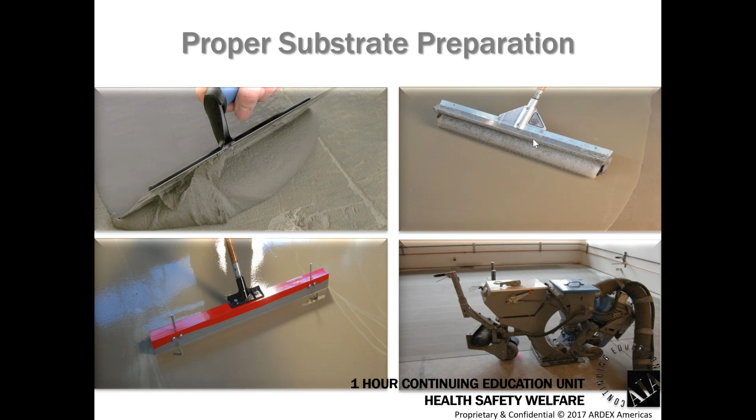As Alyssa said, we're going to spend some time here talking about proper prep. Proper prep is critical to the installation of any material going onto a substrate for its success. We're going to talk about proper prep of surfaces to receive patching and leveling products. So the bottom line here with proper prep, it's really not a one-size-fits-all philosophy. You're going to look at any given substrate and make the proper prep for that given substrate.

In doing so, making the proper preparation to that substrate, the installation is going to perform for a long period of time. It's certainly going to cost less because we have no costly callbacks.

In this presentation, we're going to spend some time on concrete. We'll look at concrete treatments such as curing and sealing compounds, the contaminants that we see out there in the industry. We'll look at the different methods of mechanical preparation - shot blasting, scarifying, grinding, those types of mechanical prep options. Certainly all concrete has joints in it, and one thing we can confirm is concrete cracks, so we'll spend some time on joints and cracks and how to address them. And then we'll get into the different other types of substrates, whether it's ceramic tile, porcelain tile, maybe wooden subfloors, epoxy coatings, terrazzo, and things like that.

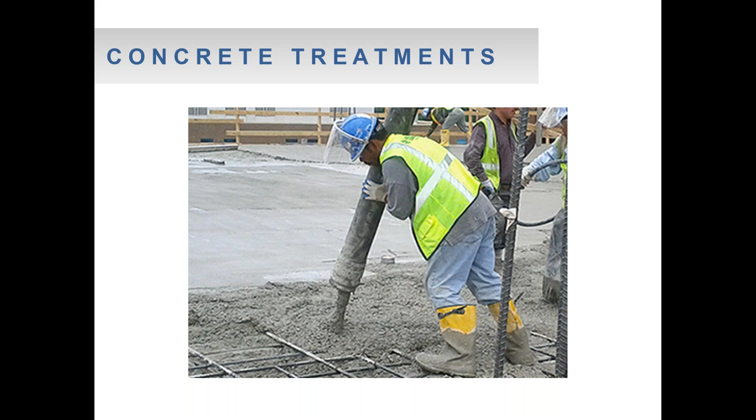So, concrete treatments. When we pour concrete, it comes out of the chute, or in this case is getting pumped, as you see. It's got to be screeded, floated, finished, and ultimately we have to cure that concrete. If we don't properly cure the concrete, then the concrete never achieves the strength properties that it was designed to achieve.

So in essence, we'll talk about curing and sealing compounds that are used on concrete, but we'll also get into burnished concrete, chemical hardeners like the sodium, potassium, and lithium silicate materials, and also look at moist curing, waterproof paper, polyethylene sheets as methods of curing concrete.

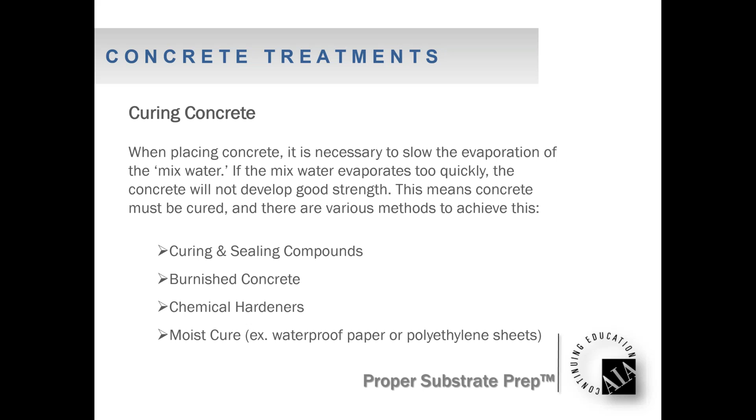The most common method is a topically applied curing compound, referenced as a cure and seal type material. That's basically once the concrete has been screeded, floated, or finished, this liquid curing compound is applied to the surface, and it will seal that surface so that the moisture that's in the concrete does not leave too quickly.

Maybe you remember back as a kid when they were pouring concrete, maybe they threw burlap on it and told your dad to keep it wet for a week, or maybe they threw straw all over it and told your dad to keep it wet for a week. Those are some conventional methods of curing concrete. Obviously not done present day, because the concrete poured commercially, as well as residentially, they want to be back on that the following day.

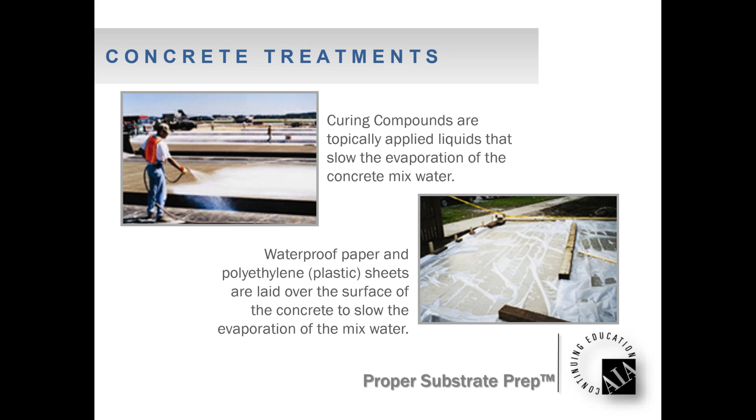So very commonly a liquid curing compound is applied. There's different types of curing compounds out there. Some are bad, and some may be okay for the installation of patching or leveling products.

The first one is what we call wax emulsion, and you can see this in the data sheet as well as the SDS. The wax emulsions are difficult ones, they're dangerous ones. Nothing wants to stick to a wax. The bottom line, when a wax emulsion curing compound is used, that's got to be mechanically removed prior to putting a patch or leveling compound on that surface.

The second category is what's referenced as a clear hydrocarbon resin. These materials you'll see in the data sheet labeled as dissipating curing compounds. The thought behind this is, hey, if it dissipates, that's a good thing, because they dissipate with ultraviolet light, they dissipate with foot traffic. So most people are thinking, if it's a dissipating curing compound, the sun makes it dissipate, foot traffic, construction traffic makes it dissipate, it's gone.

That may be the case in the middle of the slab where the sun's hitting it and where everybody's walking, but over next to the wall where the sun isn't hitting it, nobody's walking, you still may have a curing compound there. So the bottom line with these dissipating curing compounds, they're actually the most dangerous ones out there from a bonding standpoint, because you don't know if they're there or not, due to traffic, due to ultraviolet light. So with regard to these clear hydrocarbon resin dissipating curing compounds, we always say to mechanically remove those down to clean concrete.

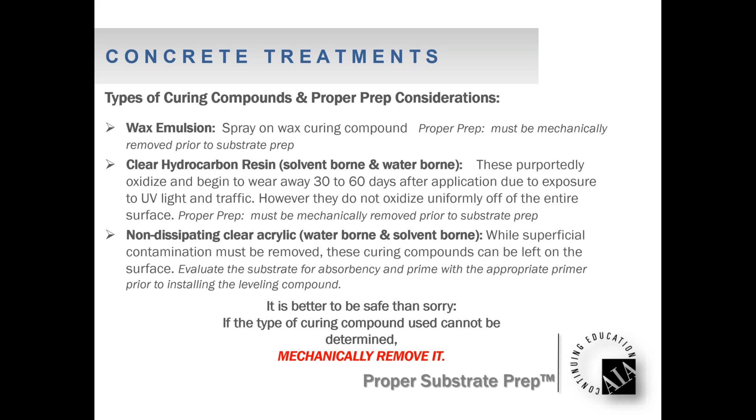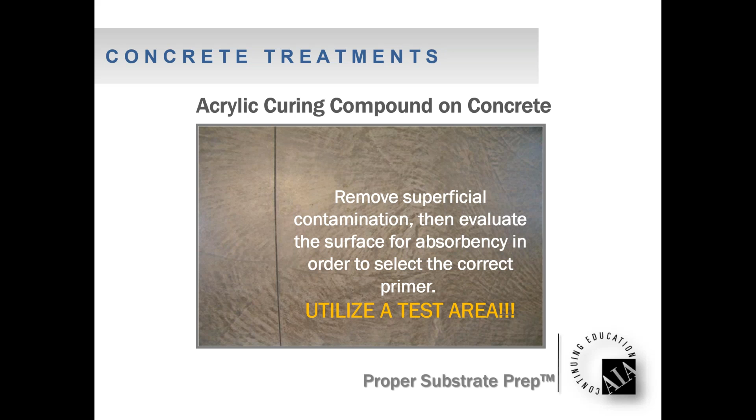The bottom line in this situation, as I said a few minutes ago, remove superficial contamination, evaluate for absorbency, and then with the manufacturer, agree on the appropriate primer as necessary, and test areas as always.

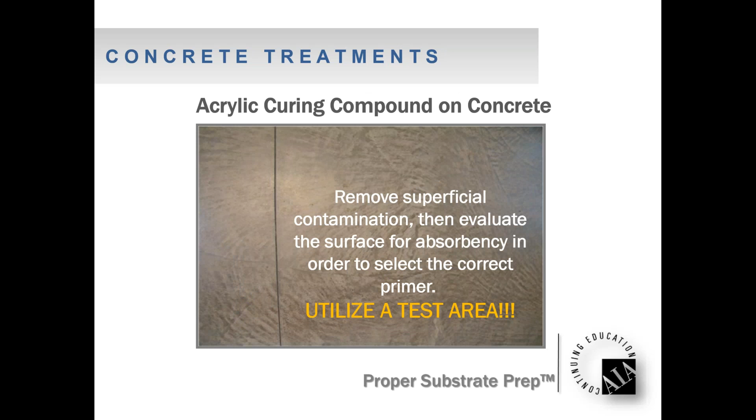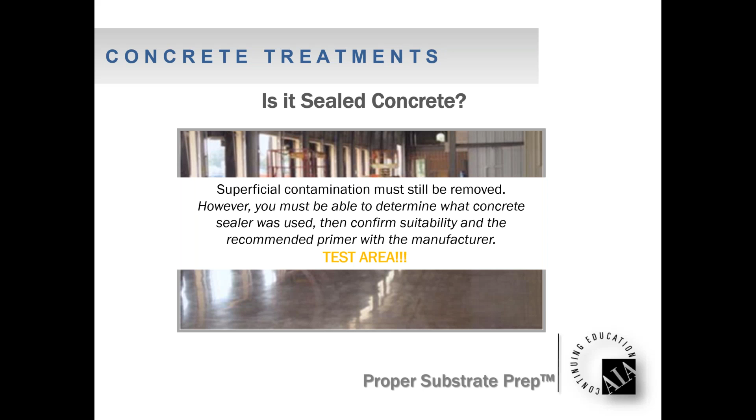I want you to keep this mental image here as well. If we go back to the previous one, we have a degree of reflectivity here. We got a little bit more reflectivity here. Is this a high gloss sealer? Not for certain. But if it is a high gloss sealer, an acrylic sealer, we'd want to confirm what was used, get with the manufacturer to confirm suitability. They may have a primer that adheres to that, and we do test areas and evaluate the test area.

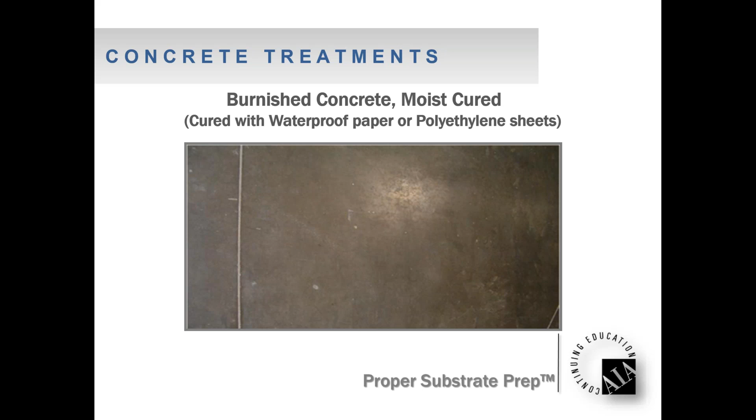Okay, burnished concrete, no curing compounds used. Again, superficial contaminations removed. Evaluate the surface for porosity. Most likely, you're not going to see water penetrate too well. Use the appropriate primer. Test areas are always a good idea.

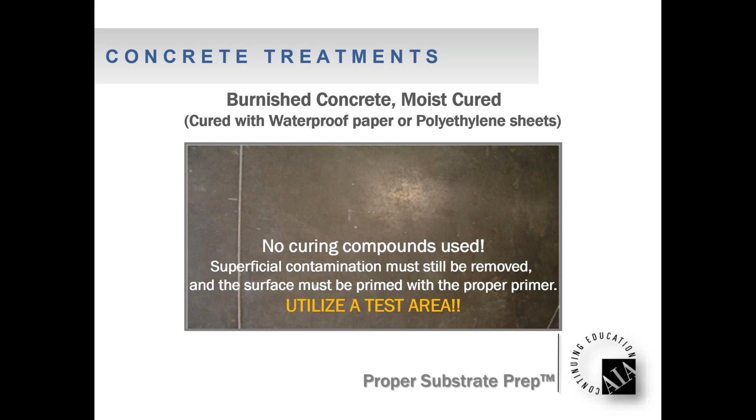All right, so I showed you all those pictures, and I asked you to take a mental note of those pictures because I want to get into how we do an evaluation here. I wanted you to look at those pictures because I wanted to prove a point. We can't just tell by looking at concrete whether it's been sealed with a curing compound, sealed with an acrylic sealer, burnished, and cover cured, because they all had a degree of absorbency. So you can't just tell by looking. We could pour water on it and do an evaluation, but I can tell you that cure and sealed concrete, concrete with a sealer on it, or polished concrete that's burnished, they all don't absorb water too well. So we can do a little bit different evaluation here.

One thing I'll mention first, and we'll need to update the slide, but one of the things you can do with the utility knife is scratch at the surface of the concrete. If it's just burnished concrete with nothing on it, when you scratch at it, you're going to make gray dust. If there's any type of clear sealer on there, whether it's a cure and seal, an acrylic, epoxy, a urethane, whatever the case, if you have a clear coating on that, when you scratch at it, that clear coating is actually going to turn a little bit white, and you'll create white fragments there. So that's a quick way to see whether there's a sealer or curing compound on that surface. Is the dust that I'm creating by scratching it gray in color, or is it white in color?

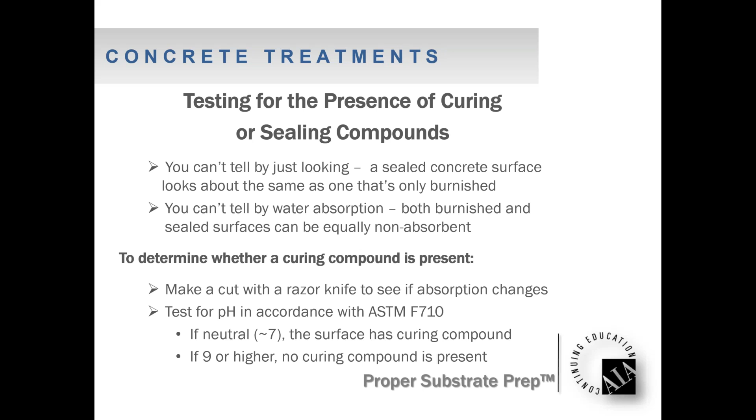Okay, let's talk about the densifiers out there. These chemical hardeners, these sodium materials, potassium materials, lithium materials, they've been around for a lot of years, 100 years, and I mean literally 100 years. The original types of sodium silicates have been around something like 100 years. So they've been densifying concrete for a long period of time. And these materials soak in and react with the free lime in the concrete, and they create more concrete binder, the calcium silicate hydrate, and it densifies the concrete. It basically can make it non-absorbent. If these chemical hardeners, these densifiers, are applied in accordance with manufacturer's recommendations, properly neutralized and properly rinsed, and that concrete's allowed to dry, there won't be any physical bond breaker on the surface of the concrete.

Now the concrete's going to be a little bit different. It's going to be densified. If everything was done correctly, it should create a non-porous type surface. Any water on the surface is not going to absorb into that concrete like it normally would, due to the chemical reaction of the silicate. So certainly water absorbency tests would have to be done. The silicate would need to be installed in accordance with manufacturer's recommendations, to include proper neutralization, rinsing, and drying. Then, per manufacturer's recommendations, you use the appropriate primer prior to patching and leveling. Test areas are always good as well.

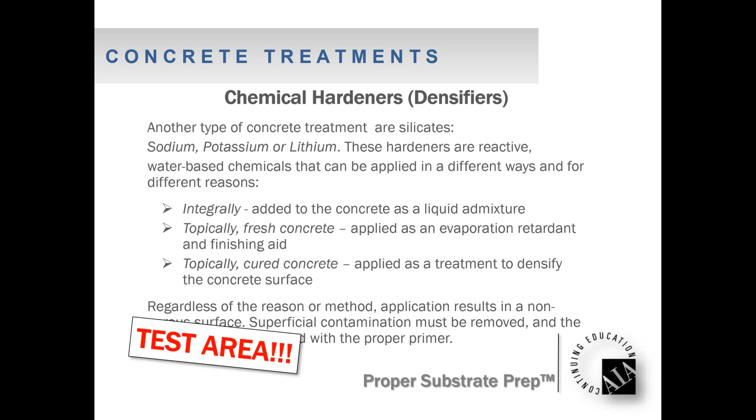Parting or release agents. The most common application of a parting or release agent would be tilt wall construction. That's when you pour a concrete slab, allow it to set and develop strength, then spray a parting or release agent all over that surface so you can pour another concrete slab over top of it, so that second slab won't bond to the first one poured. When that second slab cures and develops strength, they use a crane and tilt that up into place, and it becomes a wall. So anytime there's a tilt wall project, the surface of the concrete is going to have some sort of parting or release agent on it, so the two slabs don't stick together.

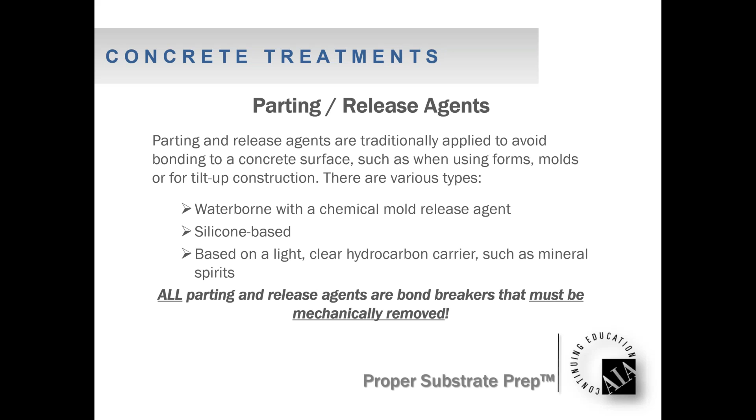The problem is that parting or release agent is not going to allow anything else to adhere to that surface. Fortunately, with tilt wall construction, those are typically warehouse floors that commonly are just left as bare concrete, so it's not an issue. But if you're putting any type of coating, sealer, patching, or leveling product, then certainly those parting or release agents need to be mechanically removed.

Some other common surface contaminants you see on job sites: certainly drywall mud, from the guys mudding walls and ceilings prior to painting. Sometimes you swear these guys are having fights. In most cases I kind of feel like they're getting paid by the bucket — they tend to have more on the floor than on the walls or ceiling. But if we have any drywallers on site, no offense, just kind of joking around here.

Bottom line is the drywall mud is susceptible to water. It doesn't have real good integrity, so that needs to be removed off the concrete mechanically prior to installing patching or leveling products.

In joking with the drywallers, I might as well joke with the painters as well. These guys that spray the walls with their airless sprayers, it seems like too often they come down off the wall and go about 12 to 18 inches onto the floor. Not sure why — you typically got base going up, so you could probably just stop right at the corner. But anyhow, if there's paint overspray on the floor, it's a potential bond breaker. So we always say to mechanically remove that.

Oil and grease — nothing sticks to oil and grease, so that needs to be mechanically removed, and we'll have some pictures on these items as well. Asphalt and tar, whether it's regular old asphalt pavement or some sort of asphaltic roof or tar membrane as part of a roof — you can't install products over those materials due to the asphaltic or tar-like nature. It could cause bond issues there, so mechanical removal is key.

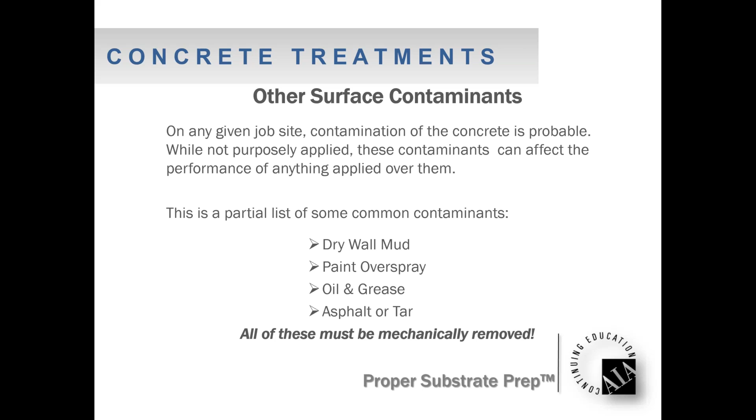Flooring adhesives — so we talked about asphaltic materials needing to be removed, and that was more like asphalt pavement. If they go into a mall parking lot where you have asphalt, they basically dig out to pour their footers, and four walls and a roof are installed, and you still got the asphalt pavement there — certainly that's not suitable for patching and leveling products. Asphaltic adhesives are a little bit of a different story, and we will spend some time on asphaltic adhesives.

But adhesives in general — a couple of things to keep in mind when using patching or leveling products over adhesives. Number one, the adhesive should be on a concrete substrate; adhesives adhere well to concrete. The second thing is we want to make sure the adhesive is not water soluble. Just about all your adhesives are made with water present day, but that doesn't mean they're water soluble.

Cutback, the black asphaltic adhesive — there are some waterborne black asphaltic adhesives out there, but the traditional Cutback, still made and used today, is a solvent material. It got its name Cutback because years ago they used to cut it with gasoline to make an adhesive out of it — use a solvent to cut that asphaltic material — and that's how it got its name Cutback.

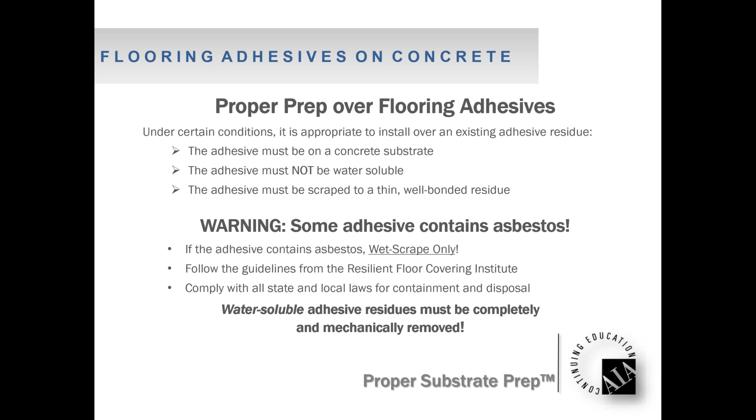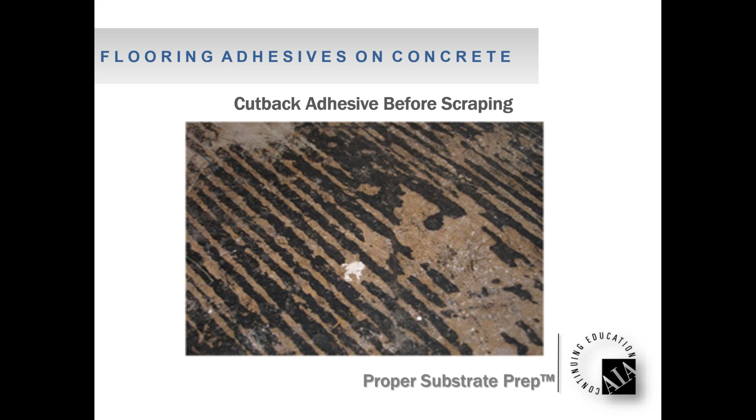Here's a picture of Cutback adhesive after some VCT was removed. You can still see the thick buildup of adhesive from originally combing that out. Bottom line is you want to scrape it down to a thin residue. Yes, there's some dust footprints in this picture that would need to be removed, but nonetheless, adhesive has to be scraped down to a thin, well-bonded residue, like a stain on the floor.

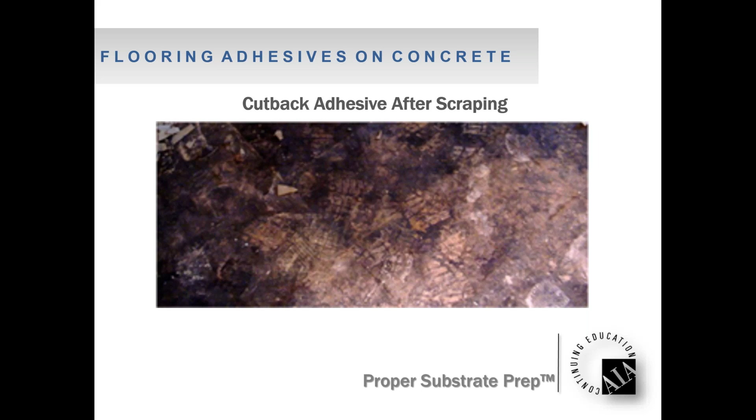So we went over this briefly, but I'll go through it here. When you have an adhesive on the floor, take your utility knife and create a crosshatch pattern. The bottom line here is you're trying to evaluate the glue to make sure it's well bonded, to make sure it's not flaking or brittle. If the glue is flaking, it's brittle, it's coming off the floor, then don't put anything over top of it. If the glue fails, then the whole system fails.

So the adhesive has to have integrity. It has to be well bonded to the concrete. So again, if it doesn't flake off, you got good integrity, it's well bonded. Get some warm tap water and put it on the adhesive for about 20 minutes. Rub it with your finger, if it feels soapy or slimy, then it's dissolving the glue. If the water's turning milky or cloudy in color, then we're dissolving the glue, okay?

A majority, just about all of your adhesives that are made present day are made with water, but when they dry, they're not water soluble. Typically, you pour water on it, warm water like this, you rub it with your finger, and the adhesive feels squeaky clean. The water is clear in color. Simple test, when you go onto a project, you're walking a renovation, just get some warm tap water and evaluate the glue. Very simple.

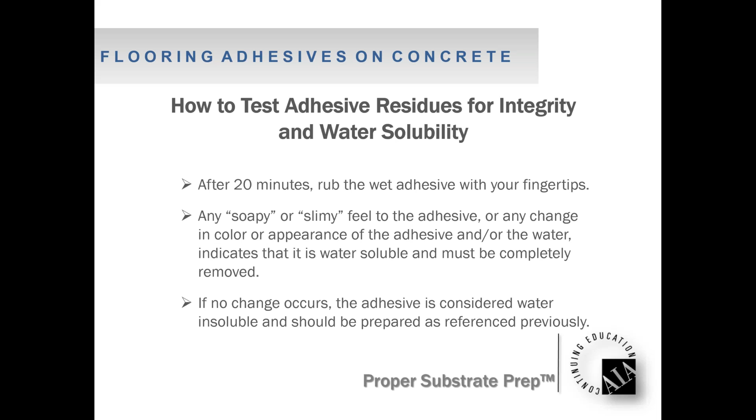Key thing here is do not use adhesive removers or solvents to remove flooring adhesives, okay? The adhesive manufacturers don't recommend it. The flooring manufacturers don't recommend it. Patch and leveling manufacturers don't recommend it.

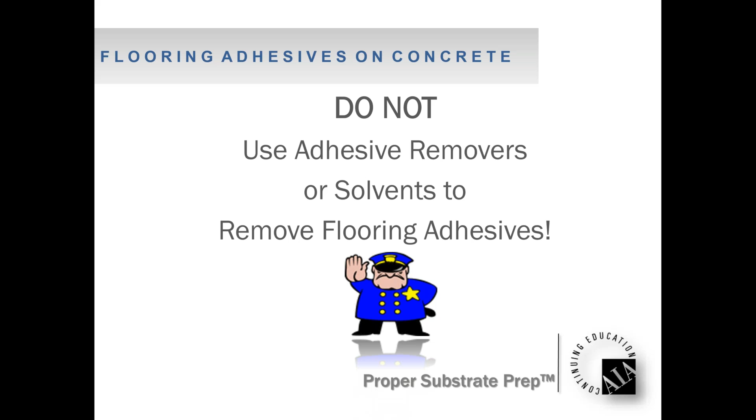ASTM F710, which is the guideline for the installation of resilient floor covering, details in that industry standard not to use solvents or adhesive removers. And if one is used, it's got to be removed. All concrete contaminated with that solvent or adhesive remover needs to be removed.

The bottom line with solvents, and here's the difficult thing: the adhesive remover or solvent doesn't know the difference between the existing adhesive and the new adhesive that's going to be installed. So it does a great job dissolving the glue on the floor. You end up removing 95% of it. What's left is a broken down residue of glue and solvent left in the pores of the concrete that can migrate into the pores and eventually come back out. It can affect your new adhesive, it can affect your patch or leveling product. Things start to fail.

Bottom line, if a solvent or adhesive remover was used, it's very common that the recommendation is to remove all concrete contaminated with the solvent or adhesive remover.

One more thing on ASTM F710, the industry standard for preparing concrete floors to receive resilient flooring. This standard details all the different contaminants we've been talking about, and details removing them from concrete to get to a clean, sound, solid surface. So installers have the adhesive manufacturers, the flooring manufacturers, the patch and leveling manufacturers, and they also have an industry standard here that they can use to show they're doing things in accordance with manufacturers and industry recommendations. That is an excellent document for any installer to have.

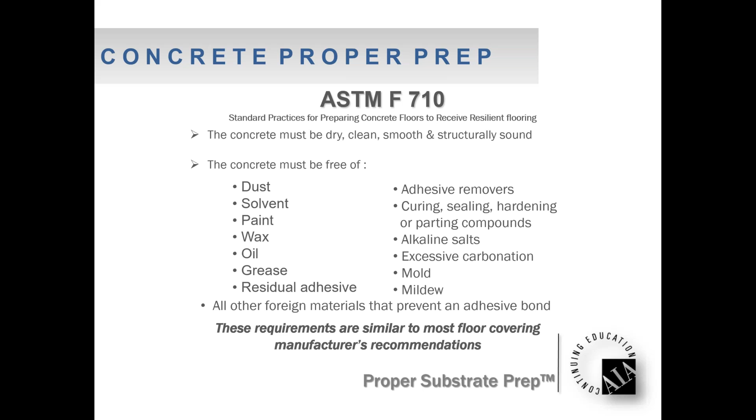Proper prep for concrete. We've talked about all these different contaminants. Let's take a look at how we can remove them.

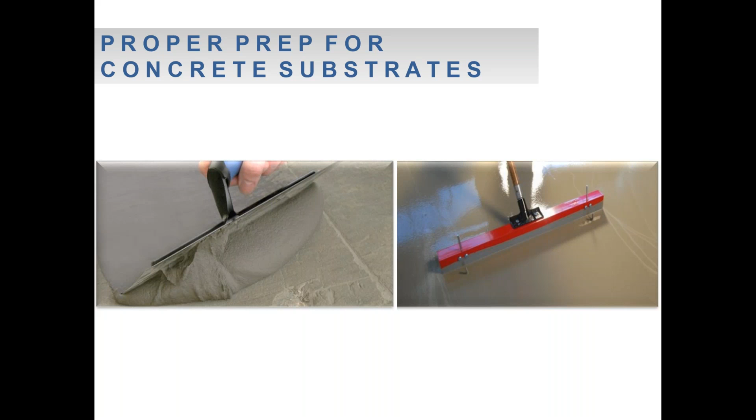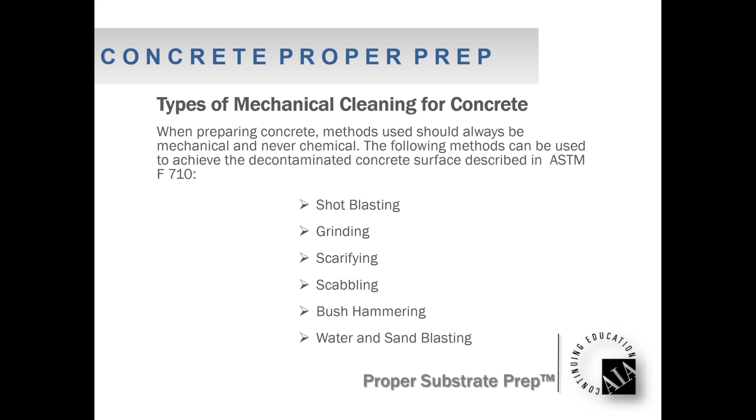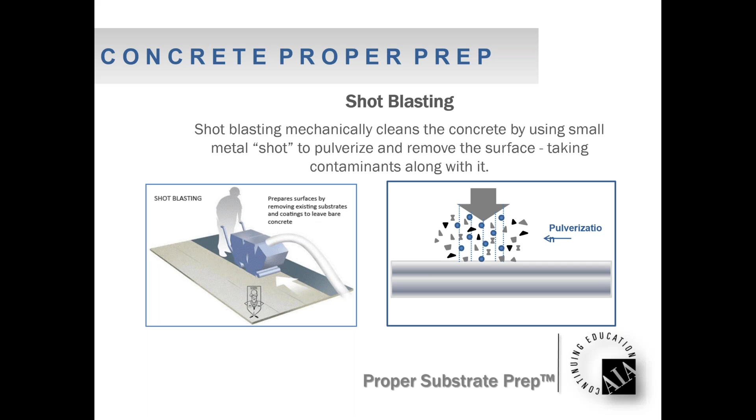Shot blasting is a self-contained machine, different sizes, but there's a wheel inside that spins at a very high velocity, and steel shot is thrown at the concrete at a very high velocity. It works on impact resistance. The shot hits the concrete and breaks up the surface along with contamination. There's a vac system on the shot blaster equipped with a HEPA filter system. The debris is very light and gets vacuumed off. The steel shot is very heavy and gets recycled inside that contained shot blasting equipment. So it's just a repetitive motion of steel shot being thrown at the floor at a very high velocity, leaving a very clean, very open surface.

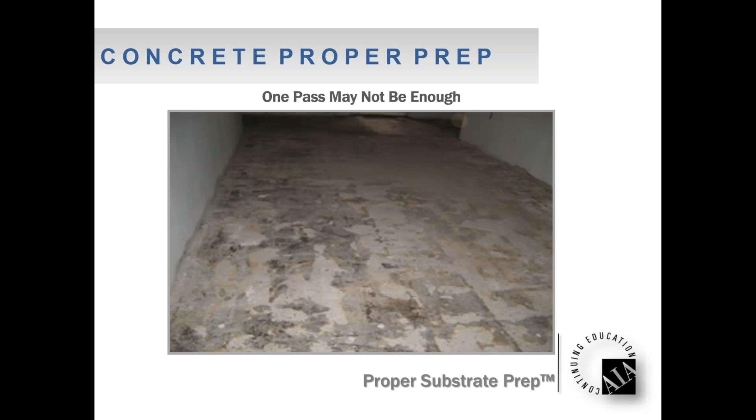Sometimes one pass isn't enough though. It might take repetitive passes to remove all the contamination. Here's a picture of concrete that's been blasted. You can see in the forefront areas that haven't been blasted, while center to the top you can see where the blaster hit. It's very clean, very open, very porous. It's easy to see where the machine hasn't hit yet.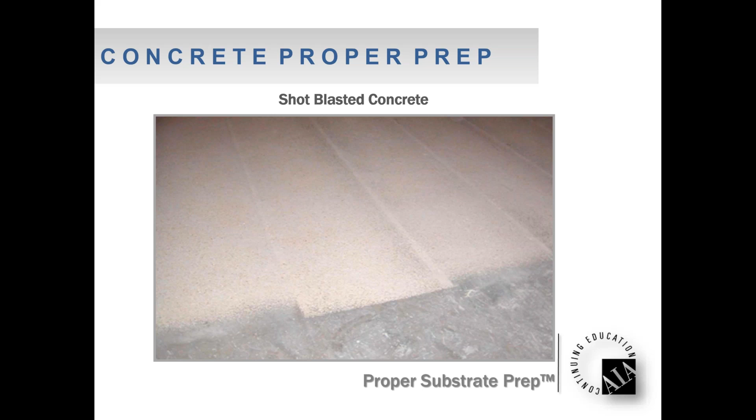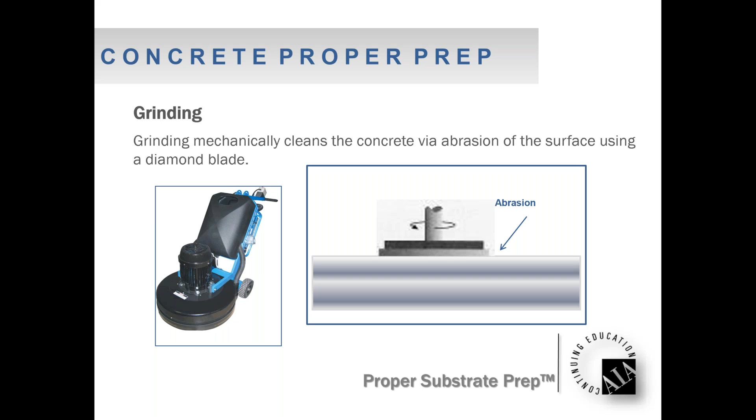Scarifying is another method of prep, not so commonly used. Typically it's used outside, though they do have electric scarifiers - this one's obviously gas run, so you're not going to operate a gas machine inside a building. Scarification consists of star-like washers, maybe 30 or 40 of them on an axle, and maybe 3, 4, sometimes 5 axles that complete a rotation. This spins towards the surface of the concrete, and you dial those spinning arms down towards the surface, physically ripping the surface of the concrete. The problem with scarification is it can create microcracking in the concrete, so while it's a mechanical method, present day it's not used as much.

Shot blasting and grinding are the 2 common methods of mechanically preparing concrete.

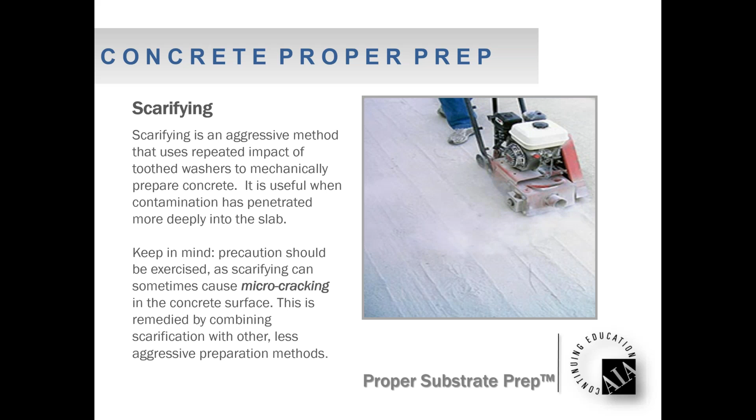Sometimes mechanical prep uncovers hidden problems, which causes additional prep. In renovation, you don't know what you're dealing with in a lot of cases, and sometimes you have to evaluate the floor. If there's any duct work coming up through the floor, remove the grill and look at the cross section. Sometimes you may have to take core samples just to see a cross section of what we're dealing with, in order to bid a job and recommend the right method of prep prior to starting.

Oil, grease, nothing sticks to it. Okay, you have an oil spot like we see in the picture here. Most likely in this situation, a little bit of surface prep probably removes all the concrete contaminated with oil.

But having said that, I've been on projects that were service stations for 20 and 30 years, and you prep the concrete today and it looks great, looks like clean concrete, but then all the oil that's penetrated the middle and core of the slab wicks

its way back up to the surface because you've opened up the surface again. So if you know there's oil contamination in the slab, sometimes it may require taking a core sample and looking at the cross sections. Most definitely, it may take prepping today and then evaluating the surface tomorrow to ensure there isn't oil that migrates right back to the surface once preparation has been done.

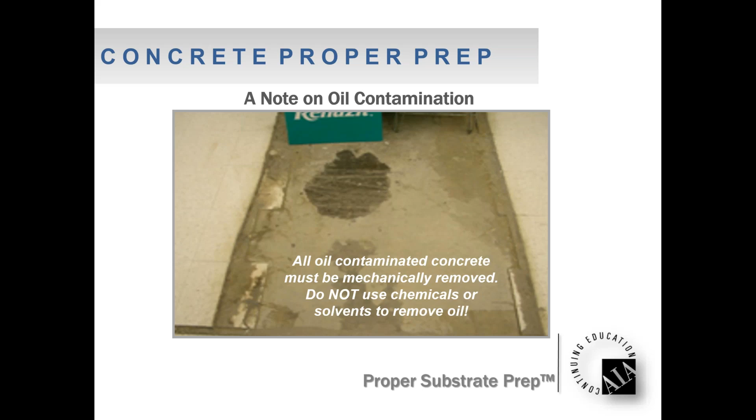Cracks and joints. We'll look at expansion joints, isolation joints, control joints, and then ultimately cracks. Expansion and isolation joints are designed in a concrete slab to allow slabs to move independent of each other, and sometimes independent of a wall, or maybe there's a structural column sitting on a concrete caisson poured 20 or 30 feet into the ground,

and you want to isolate that concrete slab from the concrete support caisson supporting that column. Those kinds of joints are there on purpose to isolate movement, and expansion and isolation joints should be honored up through the patch or leveling product and the finished flooring for that matter.

And I realize this doesn't get done because in a lot of cases, owners don't want to see a joint like that honored through their floor covering. But if you don't, and that joint moves like it's supposed to, then it's going to crack the floor covering. So it's a matter of taking the lesser of two evils. Honor the joint, and it looks like it's supposed to.

If you don't, and the concrete cracks, then the risk is, if the concrete moves and the flooring cracks, then you're dealing with unsightly floor covering.

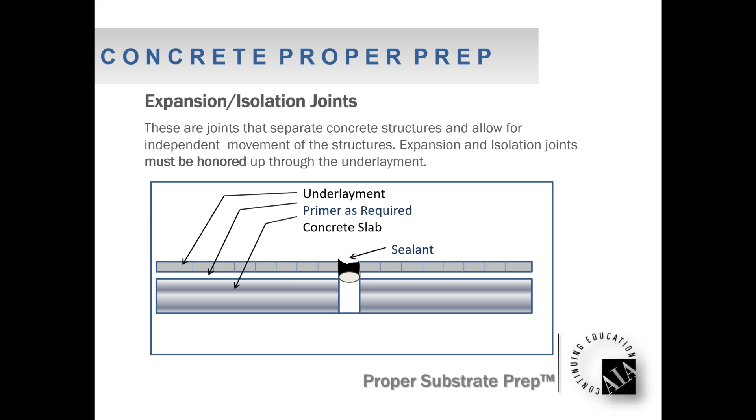Here's a picture of an isolation joint, typically a diamond like you see here, sometimes a triangle, but underneath that column is a concrete caisson that's supporting that column, and you typically got concrete poured all around.

In this situation, unfortunately, they patched over it. Those isolation joints should be honored up through the patching material. Otherwise, you install flooring over it, it moves, and then you see unsightly cracking happening in the floor covering itself.

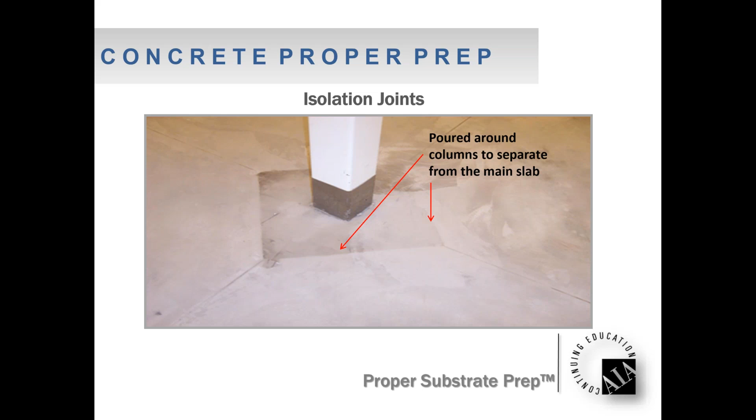Control joints are saw cuts. Slabs on grade will typically have a saw cut to control shrinkage of the concrete. We have extra water in concrete to allow it to be placed, screeded, and finished. That water's got to evaporate out. We cut control joints so that we control the cracking to that joint.

I'll teach you something new here if you haven't heard it before. A joint is basically a crack in the concrete where we want it to be, and a crack is a joint in the concrete where the concrete wants it to be.

When we put a control joint in there, we are controlling where that crack is going to happen. When the concrete cracks on its own, because there was no joint, there's no controlling where it's going to crack - it's going to crack wherever it wants to. So we cut these joints to isolate shrinkage cracking to the joint.

They're very commonly patched with an underlayment and then floor covering installed.

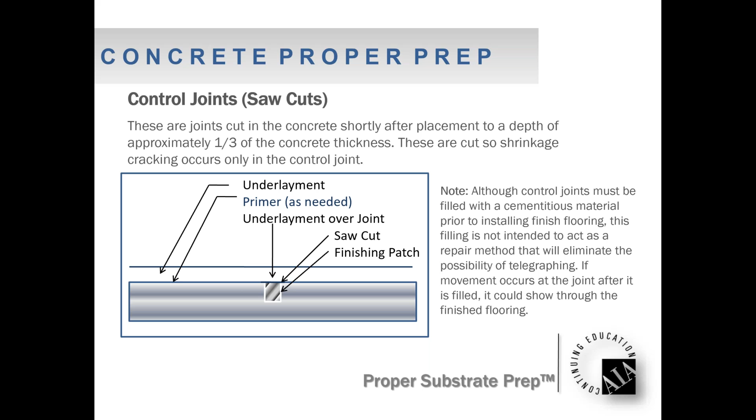Here's a crack in the concrete, not a straight line, and it basically tells you that we should have put a joint there. It moved and it cracked. If we had cut a joint, it would have had a nice straight line. Didn't do that - unfortunately, the concrete cracked where it wanted to, and you see a nice jagged crack.

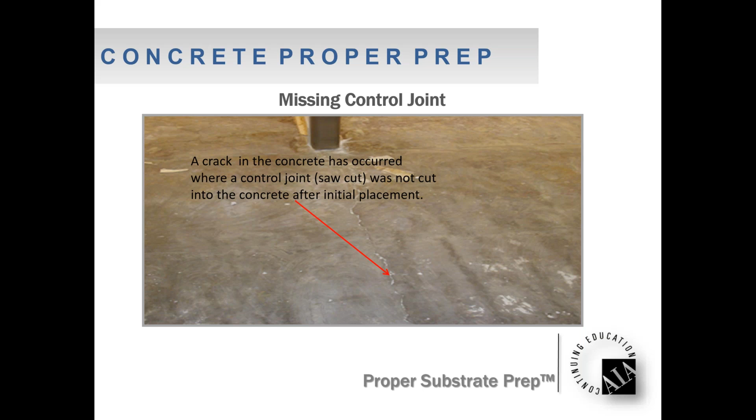Here's control joints in a concrete slab on grade, patched with a patching material, very commonly done. Okay.

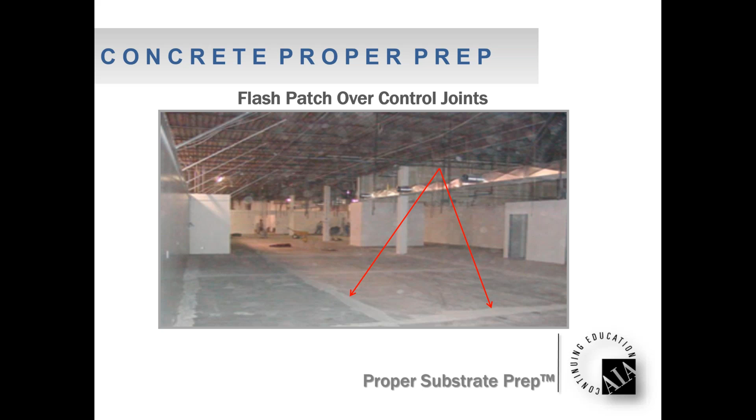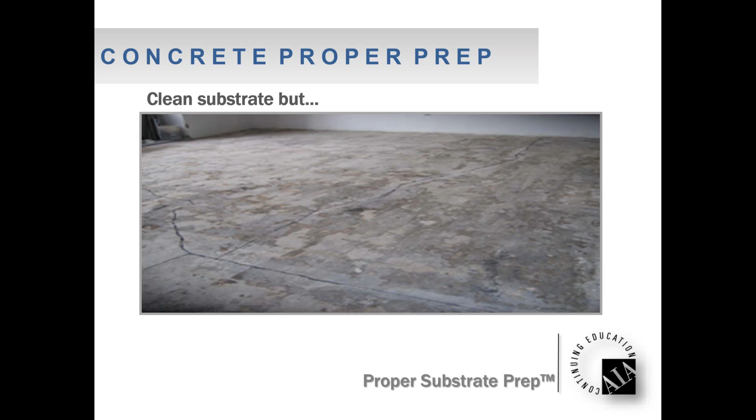Here's a concrete substrate that's clean, but we've got to deal with some patching. The thing I want everyone to know is whether it's a crack that's been patched in this picture, or a control joint we saw in other pictures patched prior to installing flooring, all the patch is doing is filling that crack or joint and making it smooth enough that you don't visually see it through the floor covering.

If there's any type of movement in the future, the patch is not going to stop that. It's going to crack, and you're going to see that through the floor covering. So if there's concern about a control joint continuing to move, or a crack being structural or continuing to move, that's when we raise the red flag and get a structural engineer in to evaluate and propose a prescription to repair.

There are different types of two-component epoxies and urethanes that can be used in these cracks and joints to help bind the concrete together and stabilize that joint. But even with those products, it's never 100% guaranteed. If that concrete wants to crack, it may crack an inch or two over from where you just repaired. Nothing's ever 100% guaranteed.

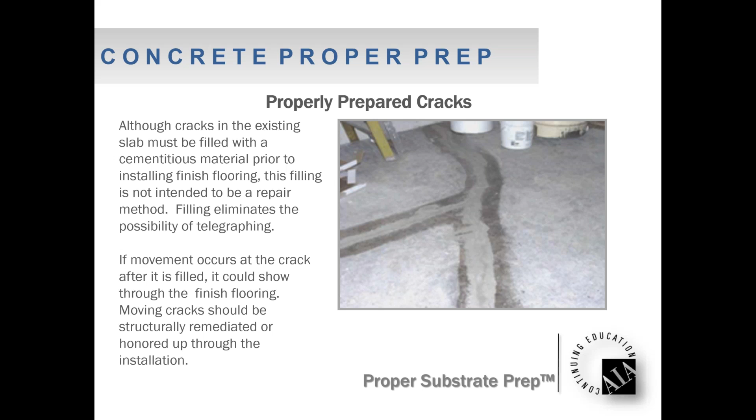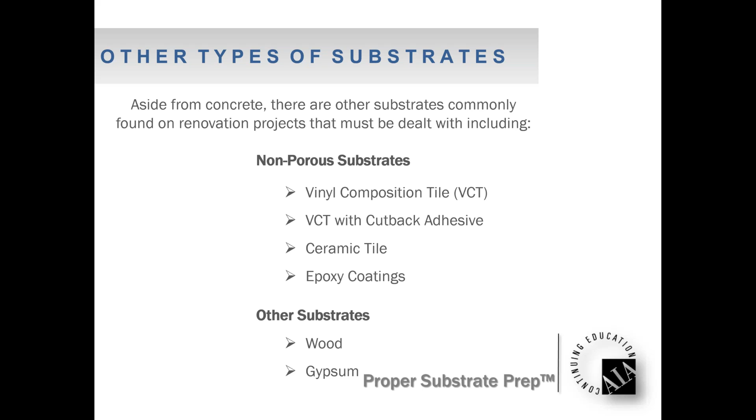Other substrates: we'll look at VCT with cutback, ceramic tile and porcelain tile, epoxy coatings, wooden subfloors, and gypsum substrates, and how to prepare all of these.

There are some products out there suitable for going over VCT. The thing we have to understand is that after installation, VCT is maintained with a floor finish, a wax so to speak. So if they're considering a product recommended over existing VCT, first we have to make sure all the tiles are solidly bonded.

Secondly, we either have to strip or sand off the floor finish or wax so we get down to clean VCT. If we use a stripping agent, we have to make sure we thoroughly allow that to dry, thoroughly rinse, and then thoroughly allow it to dry again before we proceed with installation.

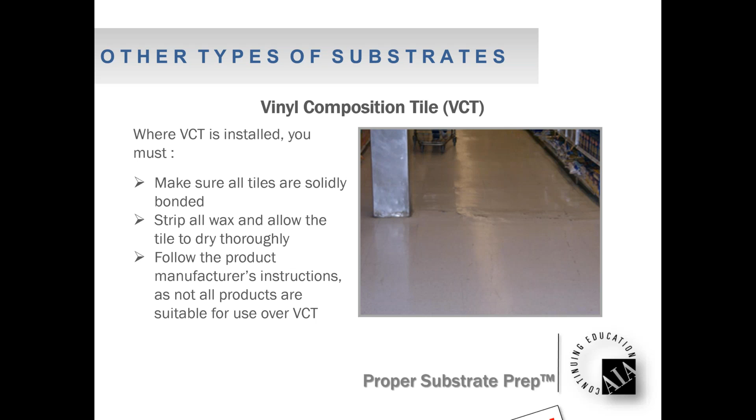In most cases, products allowed or recommended for installation over VCT may require a primer to get a chemical bond to clean VCT. Check with your manufacturer on that. If we see any loose tiles, we certainly remove them and follow the protocol we detailed earlier with adhesive residues: make sure it's not water soluble, scrape down to a thin, well-bonded residue, and prime as necessary.

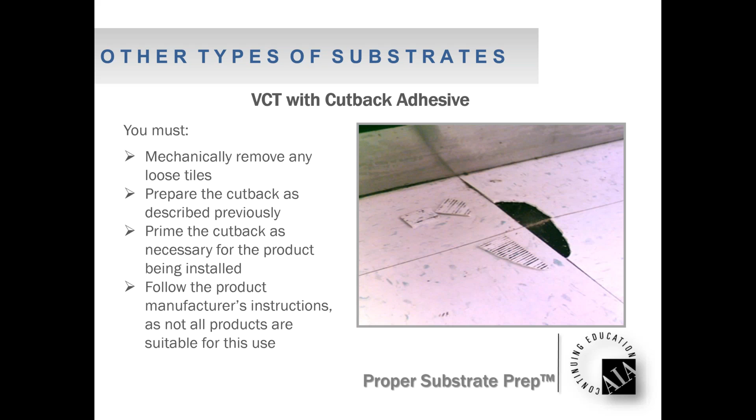Ceramic tile, porcelain tile, quarry tile: certainly make sure the tile is solidly bonded. Any wax or dressings applied after installation need to be removed, either mechanically or stripped off the floor, then follow manufacturer's instructions with the appropriate primer if necessary. Some products may require a primer, others may not. That's an installation that's been done for years and years, very common.

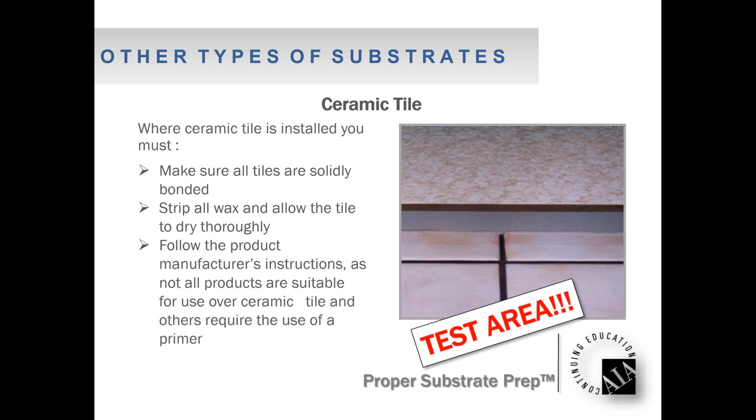Epoxy coatings: it's common that patching and leveling products with the appropriate primer stick well to epoxy coatings. Urethanes, on the other hand, are very difficult to bond to. So first we have to make sure it's truly an epoxy coating, not some sort of urethane top coat, polyaspartic, or other material. There are methyl methacrylates out there too. Let's make sure it's a true epoxy, and make sure that epoxy is sound, solid, and well bonded.

Once the surface is clean, use the appropriate primer as necessary. Certainly test areas, as we've said all day, should be done. Again, manufacturers aren't back in the lab testing all their products to see how well they bond to coatings.

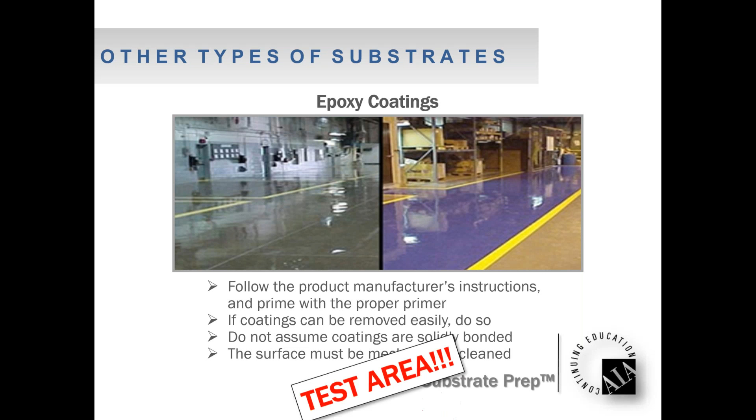Terrazzo could be epoxy terrazzo or cementitious terrazzo. In either case, the material is polished and the surface ends up virtually non-absorptive. In addition to being polished and non-absorptive, in a lot of cases there could be a sealer, a dressing, or a floor finish. We've got to get down to clean terrazzo.

If it's epoxy terrazzo, strip any waxes or dressings off, mechanically remove those, and get down to clean terrazzo. In most cases, you've got to use the appropriate primer to get a chemical bond to that epoxy.

If it's concrete terrazzo and you've hypothetically shot blasted it, you may be down to porous concrete, having blasted it to open up the polished surface. In that case, it may require a different primer able to soak in and grab onto the pores, since that's concrete terrazzo. Certainly bring your manufacturers in to help with those types of recommendations and discussions.

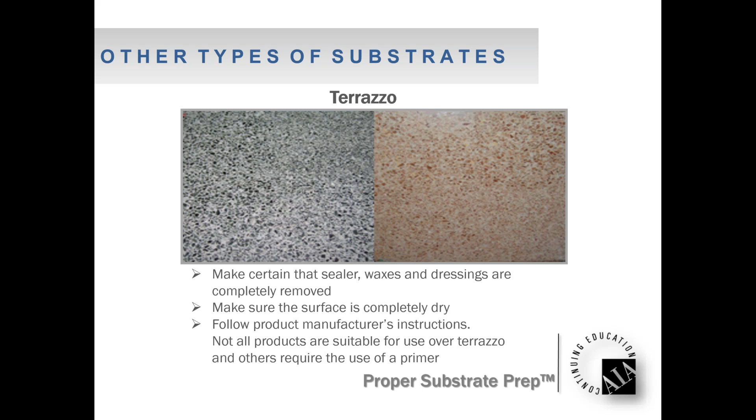Wood. Could be a plywood subfloor, could be oriented strand board. I said that and didn't just say OSB because I wish I had $5 for every time somebody told me they had an oriental strand board as a substrate. It's oriented.

So whether it's OSB or plywood, number one, we want to make sure that it's sound and solid and installed in accordance with building code. For example, joists 16 inches on center, 3/4 OSB or plywood, fastened securely to the joists, tongue and groove, with joints staggered. That's the key thing. No matter what the code is, make sure we have a subfloor and then the proper plywood or OSB that's all installed to code.

If there is any contamination, certainly sand to clean wood. Then we follow manufacturer's instructions with regard to priming and the use of leveling material, keeping in mind there are some leveling materials that do not require a primer when installed over wood. So make sure you got the right recommendation from the manufacturer.

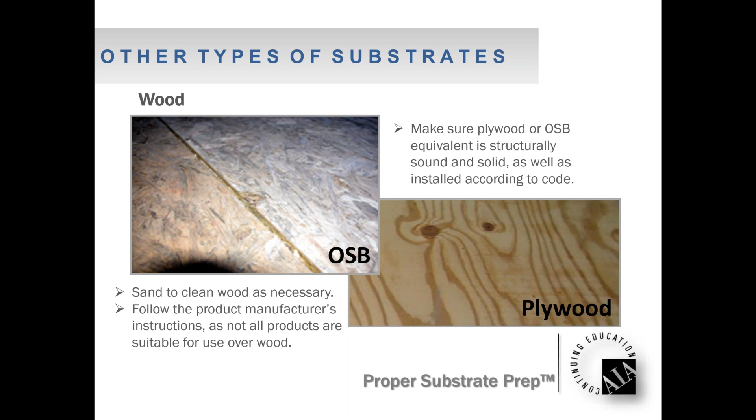Gypsum. We've certainly seen distressed gypsum in renovations, lower income housing, some of the precast hotel type work out there. You'll see a poor gypsum subfloor over top of a wooden subfloor, typically three-quarters of an inch minimum, up to an inch and a half. You get into these renovations and tear it up, and sometimes we really don't see good results here, and it could be all disbonded and loose and dusty.

If that's the case, shovel it all out and start over. But there might be some integrity there, it might be solid, and there are products out there present day that can be used to go over traditional distressed gypsum. The older style products, when they cured, created a lot of tension. If they were installed over top of gypsum like this that doesn't have super good integrity, those products could cure and tear the gypsum apart, and that's the expensive way of tearing the gypsum out.

But present day, there are engineered leveling products, gypsum, plaster, Portland blend products that don't create tension and are suitable for these applications. Make sure that the gyp is sound and solid. We don't want a super weak surface, just dusty or chalky. It's got to have some degree of integrity to begin with.

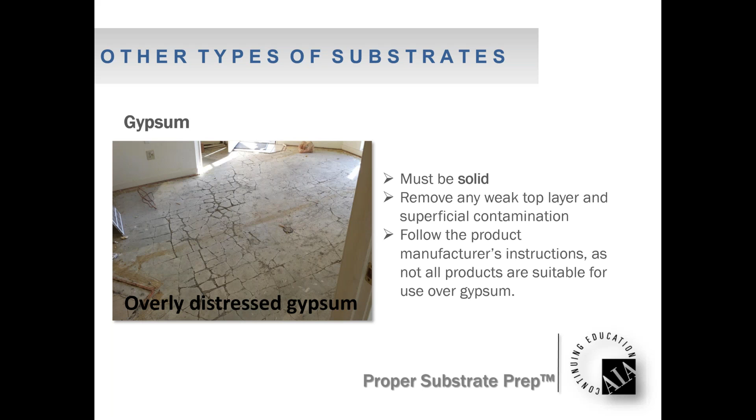The bottom line here with what we've learned today, and the critical piece, is proper prep is not one-size-fits-all. It's determining the proper preparation needed on any given project, no matter what that may be. In some cases, it could be just sweeping and vacuuming the floor. In other cases, it may require aggressive prep like shot blasting or grinding, followed by the appropriate vacuuming.

The other thing I want to make known to you is, rely on your manufacturers. Reach out to them, have their reps come out on site, review the installation with you, have their technical departments write recommendation letters copying all parties involved, saying we need to do A, B, C, D, E, F, G, so that everybody involved knows what needs to be done and things are followed in accordance with manufacturers' recommendations. All warranties are in place, and most importantly, you never have issues going forward. Take the time to do it right.

Sorry about that. We're going to spend a little time going over the different products that we have that cater to patch and leveling applications. We'll start with the self-leveling category. This is our complete lineup here.

K15 self-leveling that we brought to the States back in the late 70s. It's been around, developed back in 1976. It's been one of the most widely used and specified materials throughout the years.

We have a newer technology called K13, we'll spend a little time on that. We have a reactivatable product called K10, a pretty cool material.

The K10 is a reactivatable product, meaning you get about 20-25 minutes of working time with that product as you're spike rolling it. Then you can actually reactivate it with the spike roller to give you more working time.

We'll spend some time on V1200 as well, that's our workhorse. We've got a couple specialty products here: K60, we'll touch on that. And the last one, we saw the gypsum substrates.

It is K22F. We use this as a product to repair distressed gypsum. It's a hybrid material made up of Portland, plaster, and gypsum. Very high strength, nearly 6,000 compressive strength. We put microfibers in there that increase flexibility - it's like 3 times as flexible as standard concrete, so pretty cool material.

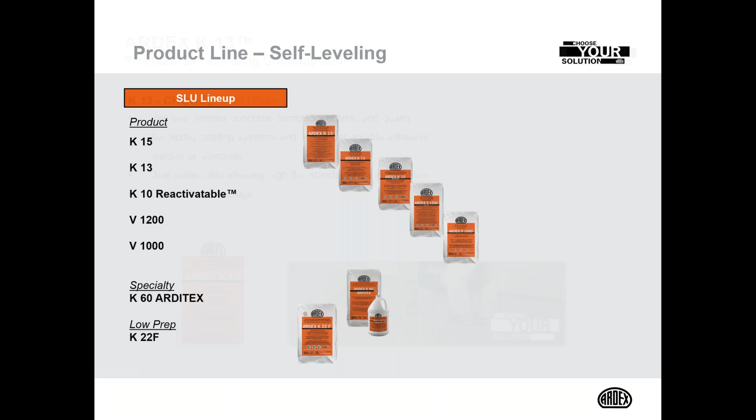K13 is a product gaining a lot of popularity. For us, it's our first dual water ratio - it has a standard water ratio mix, but then it also has a high flow water ratio mix. This gives the contractor the luxury of going deeper where they want more body and a thicker, heavier body product using the lower water ratio. But if we're going in a thin application, maybe 1/8 inch over a mitigation system, we can go to the high water ratio and do an 1/8 inch across that floor just to have a blotter layer for the floor coverings. You have that porous 1/8 inch blotter layer, so your waterborne adhesives have somewhere for the moisture to go. So that's a newer product for us, gaining a lot of popularity due to its dual water ratio.

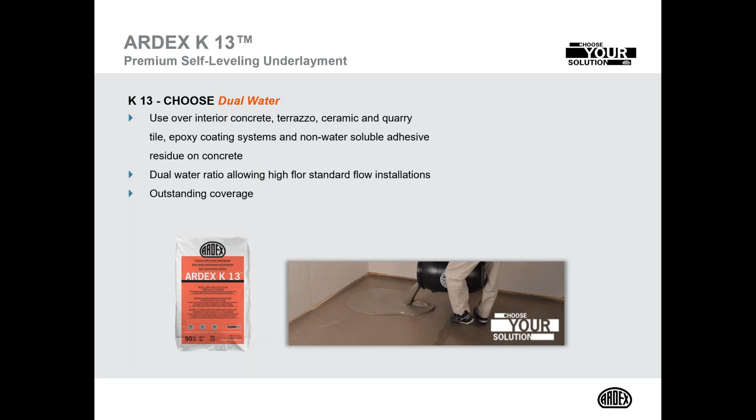Floor covering the following day, so it's a pretty quick product from a drying standpoint.

V1200 is our workhorse. This is our primary self-leveling product that's used day in, day out. It's a very cost-effective material. In addition to its versatility, you can use it over concrete, over non-porous surfaces like ceramic or terrazzo, quarry tile, go over epoxy coatings, and even over adhesives as we discussed. So pretty versatile product there.

Very good flow and heal properties with the V1200. Most floor coverings in 24 hours when you're going 1/4 inch, 3/8 inch. We can go up to virtually any thickness with this product - just when you're going deeper, it takes a little longer to dry.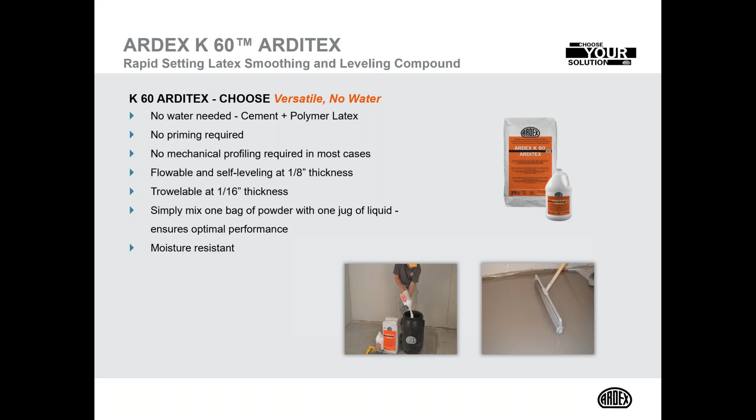One of the new products new to the line is called K40. This is a self-drying technology product. We're pretty pleased with this product. Floor covering in as little as 2 hours. This material cures chemically—it has the ability to chemically bind up all the mixed water, so it doesn't have to evaporate water. Traditional floor covering like vinyl tile, plank, vinyl sheet, rubber flooring—as soon as it's hard, a couple of hours.

Compressive strength on this is crazy—you're over 8,000 after a month. But the cool thing about it is, with this rapid strength development and the ultimate strength this product has, my thought was it was going to have a lot of tension, a lot of pull as it's curing. And this product does not have a lot of tension at all. So it's a newer technology, lower tension product, but it's self-drying and you're putting flooring on it very quickly.

It's also a high flow product, so we can use it at 1/8 inch thick as that blotter layer I was talking about a few minutes ago. So both the K10, the K40, and the K60 can all be applied at 1/8 inch thick over mitigation systems for that blotter layer application.

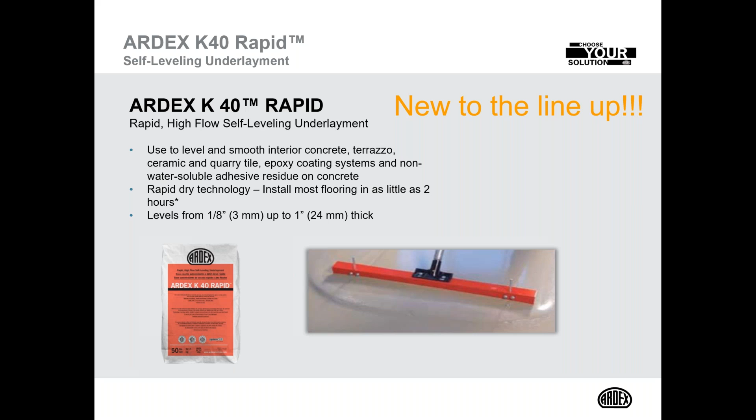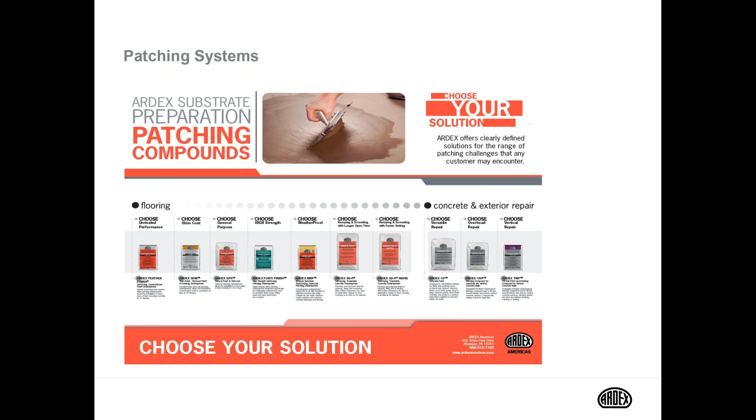Moving on to the patching category, we have a variety of different patching materials, from interior products to exterior products, to underlayments, to toppings. We have something for every solution out there. There's a couple here that we'll touch on.

Our Pride product is Feather Finish. This was a product born out of feedback from installers and manufacturers. This goes back to 1992 when we were in development here—it's a voice of the customer product. The contractors and flooring manufacturers were fighting gypsum patches back in the late 80s and early 90s, and the Portland cement patches at that time were sanded and took a long time to dry. Many of these manufacturers and contractors were saying, 'Hey ARDEX, why can't you make a cement patch that dries like the gypsum products very quick, is unsanded like the gypsum products, but is a Portland cement and calcium aluminate cement based product that isn't affected by moisture like the gyp products are?' We basically took that to heart and developed Feather Finish.

Unsanded, mixes with water, sticks to virtually anything, self-drying. At a skim coat, it's done in like 15 minutes. At 1/8 inch, 1/4 inch, you're hard enough for flooring in about 30 minutes to an hour. It's been the patch for a lot of years, dating back to '93 when we officially introduced that product.

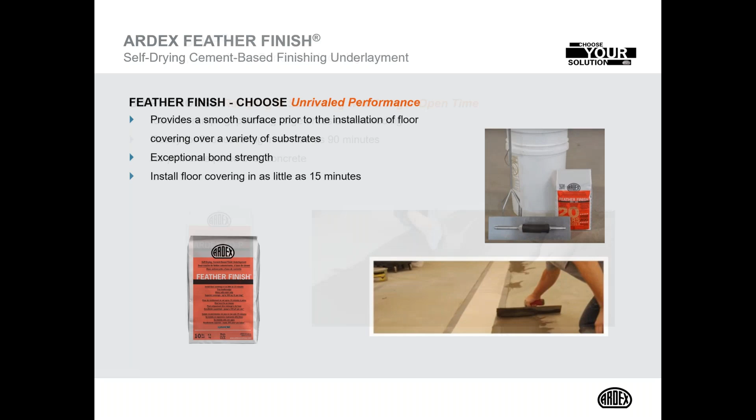We also, back in the mid 90s, introduced a product called SD-P. It's kind of Feather Finish and SD-P, like the 1-2 punch. SD-P is a sanded material, has sand in it, and it's designed for ramping, screeding, and floating applications—1 inch thick, 2 inches, 3 inches thick. So you can make transitions with this, create ramps with this material, but it's self-drying, so it's like a rock in about an hour. You can put floor covering on it in as little as 60 to 90 minutes. So SD-P is your rampable, slopable, screedable type transitioning repair mortar.

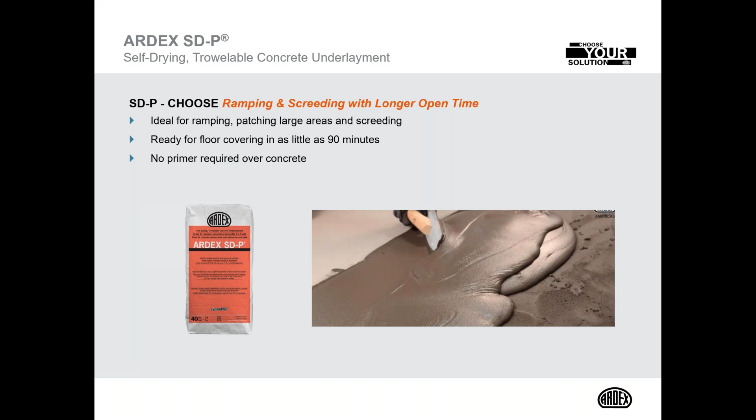Feather Finish is your unsanded skim coat product. Both products are self-drying and allow flooring on them in as little as 60 to 90 minutes.

Newer product for us, and this is also voice of the customer, as we see more floor coverings being suitable to 100% RH. The problem with these adhesives and floor coverings is your traditional patching and leveling products, pick a manufacturer, they can't handle liquid water or being damp indefinitely. We answered that from a leveling standpoint with K60, but from a skim coat standpoint, we didn't have a product that fit that mold. We wanted, the field wanted, an unsanded, water-mix-only product like feather finish, but that could be indefinitely damp, could be used outside if necessary, without being broken down by constant liquid water.

We developed MRF, that stands for Moisture Resistant Finish. It can be used outside, it's weatherproof. It can be indefinitely damp with no adverse effect. We can use it, just like K60, underneath the moisture mitigation systems. It doesn't matter if this stays wet indefinitely, that's what it was designed for. So now it's a 1-2 punch with regard to moisture and 100% liquid water RH: you got K60 for the leveling standpoint, you got MRF for the patching and skim coating standpoint. So those two go together.

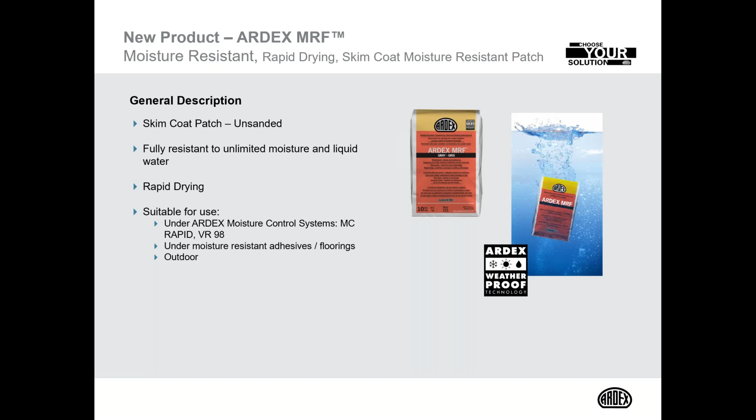With regard to our systems, we certainly talked about substrate preparation here, but we have a complete line of moisture control products I've touched a little bit on here. Back in 2000, we acquired the W.W. Henry Company, the world's largest and oldest adhesive manufacturer. We acquired them from Armstrong. So W.W. Henry's been a part of ARDEX for 20 years now. We have the Henry brand of adhesives under our umbrella.

We have a full line of exterior grade engineered repair products as well as structural repair products.

When you look at ARDEX from a global standpoint, even though ARDEX Americas was always known as the patching and leveling company, when you look at us from a global standpoint and the ARDEX, the 44 ARDEX companies globally, technically we're a tile and stone installation products manufacturer. In the other parts of the world, Europe, the UK, Australia, et cetera, the core business ends up being tile and stone products. So needless to say, we have a complete line of waterproof membranes, thin set mortars, specialty mortars, grouts, uncoupling membranes, heat systems, full line of tile and stone installations.

And then finally, we have a complete category of finished surfaces. Dating back to the mid-80s, when installers wanted to use our self-leveling underlayments and our patches as toppings, we decided to develop products specifically for that. So we've been doing finished surfaces back into the 80s. The decorative aspect, the integral color, topical stains, decorative saw cuts, logos, dates back to the 80s as well. And as a manufacturer, we strongly got involved with these to support our customers into the 90s. So we've been doing the integrally colored applications, the decorative saw cuts, the logos, for many years. Polishable toppings, we've been doing that for 10 years now.